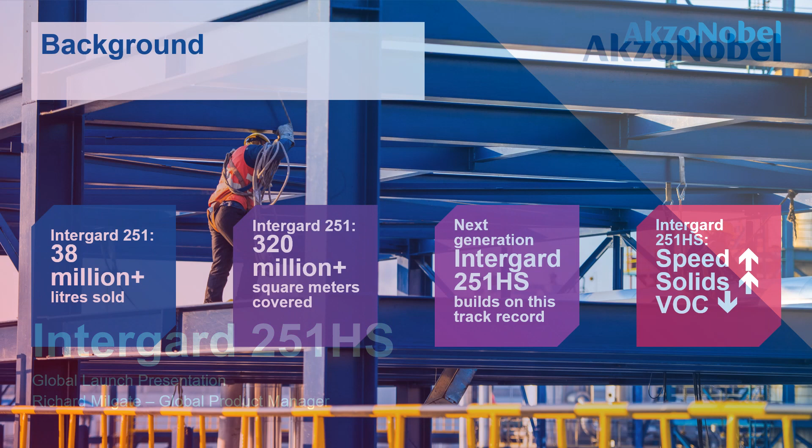Let's start with some background. Intergard 251. We've sold 38 million litres plus worldwide. That's the equivalent of about 320 million square metres of steel covered with one product. The next generation, Intergard 251HS, builds on this track record. We've got increased speed, increased volume solids, and reduced VOC.

Continuing with some more background, Intergard 251 has been the global workhorse epoxy zinc phosphate primer from AkzoNobel International Protective Coatings for a couple of decades. As I said previously, more than 38 million litres sold, 320 square kilometres, 120 square miles of steel that's been painted. To put that in some context, it's about 5 times the area of Manhattan that has been painted with Intergard 251.

Intergard 251HS continues to be phased in as the next generation epoxy zinc phosphate primer, and it's got some enhancements over the previous generation. We were having a DFT range of 50 to 75 microns for Intergard 251. That's been boosted from 75 up to 200 microns. Increased temperature range, 5 degrees, no problem, and increased cure speed across the temperature spectrum. At the time of writing this presentation, we'd sold globally more than 1 million litres already of Intergard 251HS.

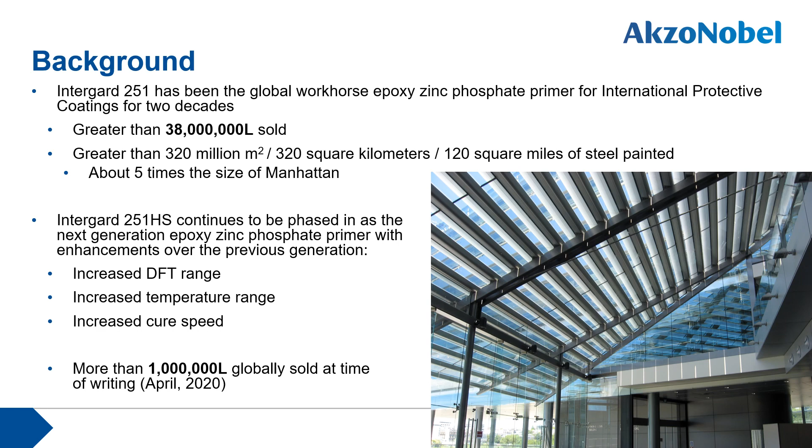Moving on to the overview of Intergard 251HS. There's 3 key features to Intergard 251HS. Versatile and robust application properties. The higher film thickness allowance has meant that complex geometries such as corners and so on have much lower risk of sagging. Less sags means less rework, means less cost and sail out quicker. The product's been sped up as well compared to the previous. We've got faster cure times across the board and reduced recoat.

In terms of system flexibility, with the high thickness allowance, Intergard 251HS can deliver a C3 very high durability, that's 25-year system in 2 coats, and in C4 you can deliver up to high durability in 2 coats.

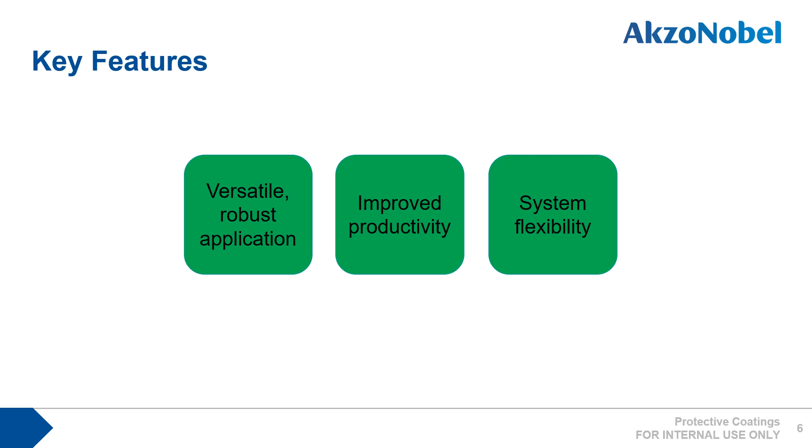So what are the details around Intergard 251HS? It's a 2-component, high solids, fast drying zinc phosphate primer and intermediate in one. 75% volume solids, 243 grams per litre of VOC. Now, depending where you are in the world, there's 1 to 3 colours available, grey, red or buff. In most locations, there's a couple of those colours.

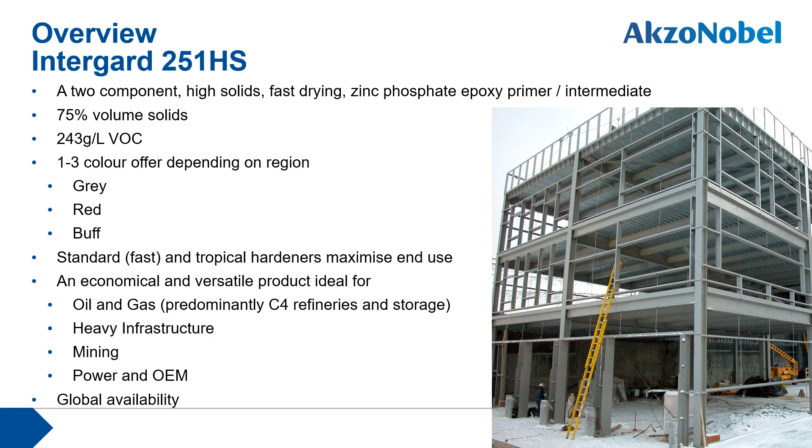We've got 2 hardener speeds. We've got a standard hardener, which is on the faster end, and a tropical hardener to maximise end use. So in areas where we've got 25, 30 degrees continually, the tropical hardener can maximise the pot life there. It's an economical and versatile product ideal for oil and gas onshore, predominantly C4, C3 refineries and storage, heavy infrastructure, mining and power and OEM market. And we're rolling Intergard 251HS out now as a globally available product like 251.

Moving on to the anti-corrosive performance. We've got some external exposure data with Intergard 251HS and painted with 990 over the top. These panels are pictured on the right of this slide. The system we selected for this test was Intergard 251HS, 150 microns, followed by Interthane 990 at 50 microns. We did some real-world exposure on these at the Port of Sunderland in the UK. That's been classified as CX environment, and from the photo there you can see the conditions the panels are exposed to. It's fairly rigorous in terms of the load on the coating there to protect the steel.

On the very right hand side you can see only slight blistering on the scribe at 44 months, which is very good. There's some discoloration there. We don't believe that's due to breaking down of the Interthane 990. We believe that's from a local chemical plant and some pollution that may be landing on the panel with age.

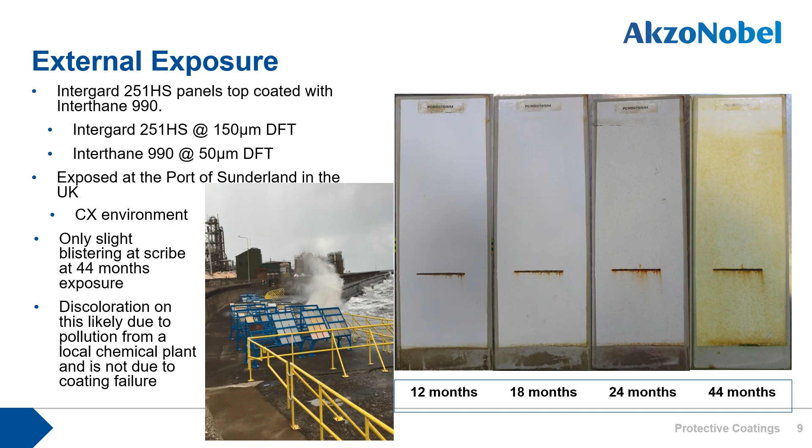Product attributes. For those of you who are familiar with Intergard 251, I've lined up Intergard 251HS side by side to compare the 2 products. The 251HS has got a great improvement in solids, substantial reduction in VOC, nearly to the level of a high solids mastic, and the DFT range is upgraded substantially from 50 to 75 to 75 to 200.

But where I think Intergard 251HS is best is in its curing times. So from the old product, 7 hours at 10 degrees, which was about the bottom end, we've gone to 4 hours recoat at 5 degrees. There's a time saving at 25 degrees as well.

One of the slight disadvantages of 251HS is the pot life is reduced. So at 25 degrees, we've got a 1 hour pot life, meaning your steel needs to be ready before you start mixing up your paint. Now, if that's a bit challenging, there is a tropical hardener which extends the pot life slightly. And for those who are working in, say, 30 degree and hotter environments, you'll probably look to use the tropical hardener straight away.

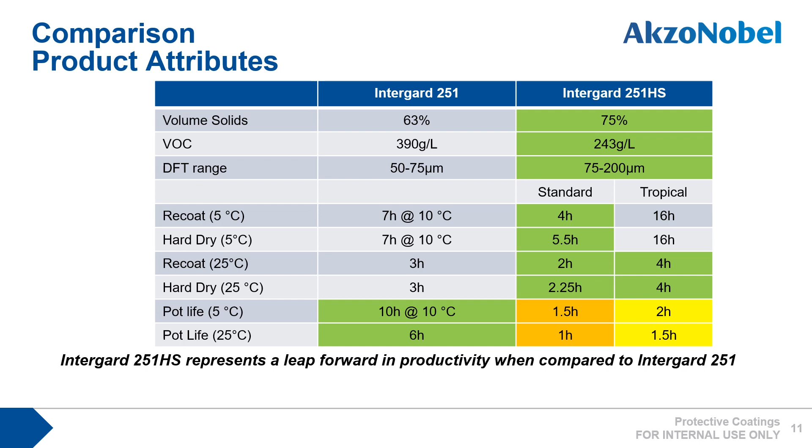Here's an application example from 2017. It's the application of Intergard 251HS to a chute used in the mining industry. There are some areas of complex geometries, and the feedback from the applicator was it was easier to achieve coverage in the flat areas without any sagging in the more complex areas.

On the left-hand side, we can see a picture of the freshly painted steel in the complex areas there with no runs or sags, but achieving the minimum 75 required in the main areas. And the photos are of freshly applied paint, so it's not actually a glossy paint, it's a sort of matte or low sheen paint, and when it's dried off, that gloss will go away.

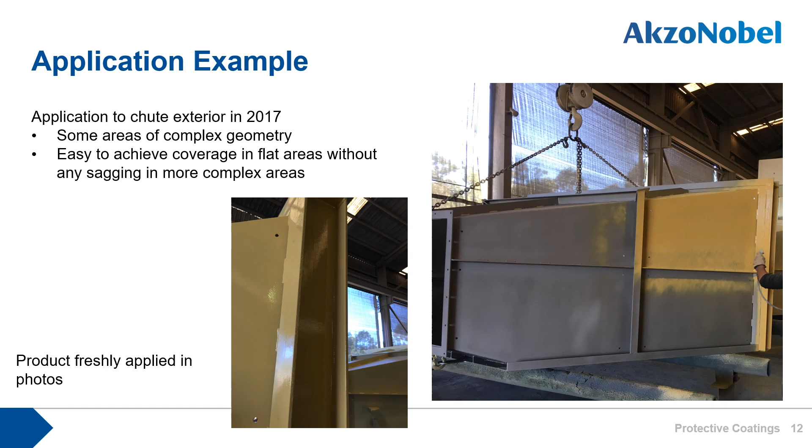Now to look at the competitive landscape. So what makes a great product? Is it one that maximises productivity, has low VOC, has high volume solids, or wide end uses? Or is it a balance of all of the above properties all in one product?

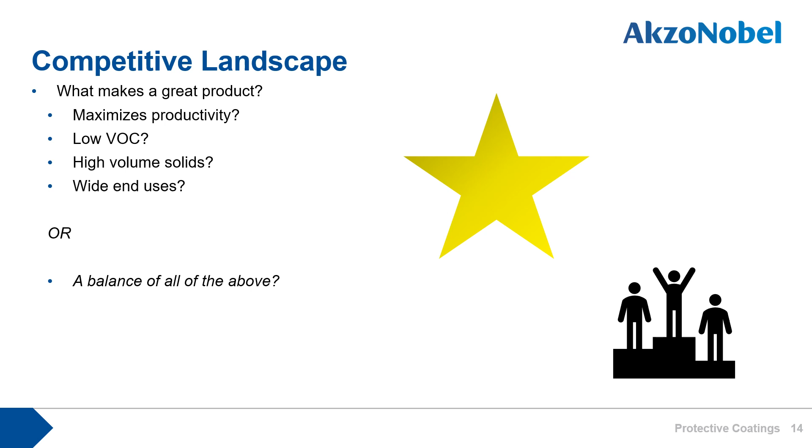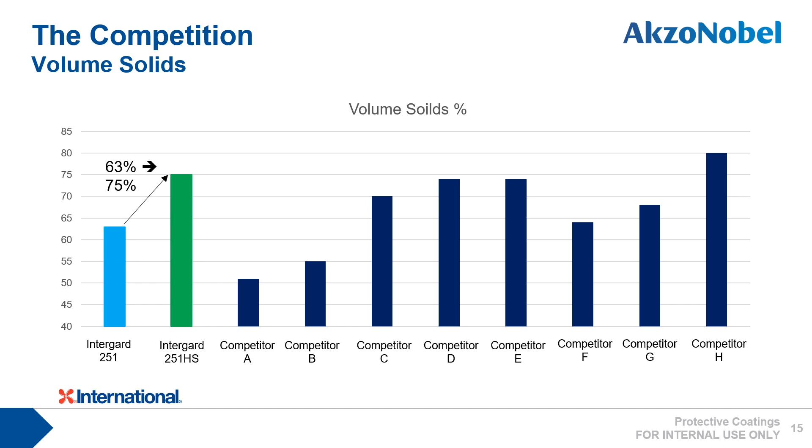A little bit of comparison now between the competition and Intergard 251HS. We can see that we've increased the solids from 251 to 251HS up to 75%. That's kind of put us near the top of the playing field here. On VOC, Intergard 251, we weren't particularly competitive on VOC, but now with the new product, we're down close to the market leader.

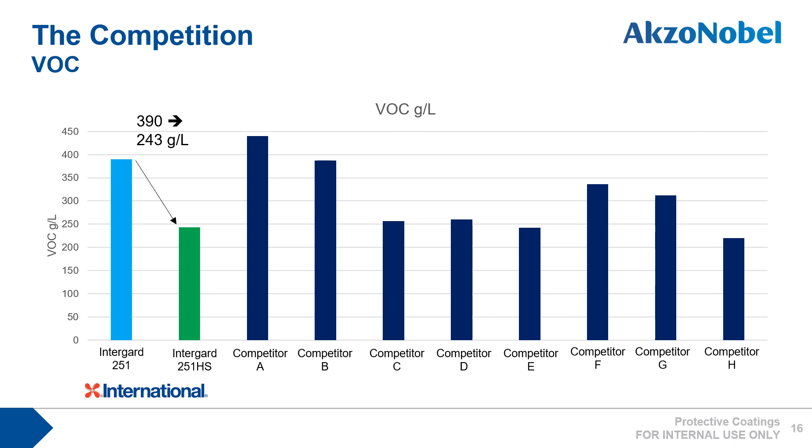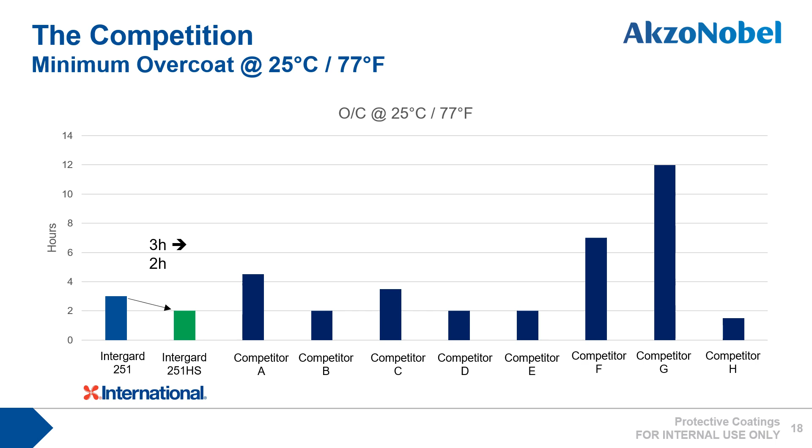Moving on to customer trials. International Protective Coatings was pleased to be selected as the protective coating supplier for Yogyakarta International Airport in Indonesia. The new airport's got lots of steel, and in many situations Intergard 251HS was used as a primer under an Interchar product to protect the building in the event of fire.

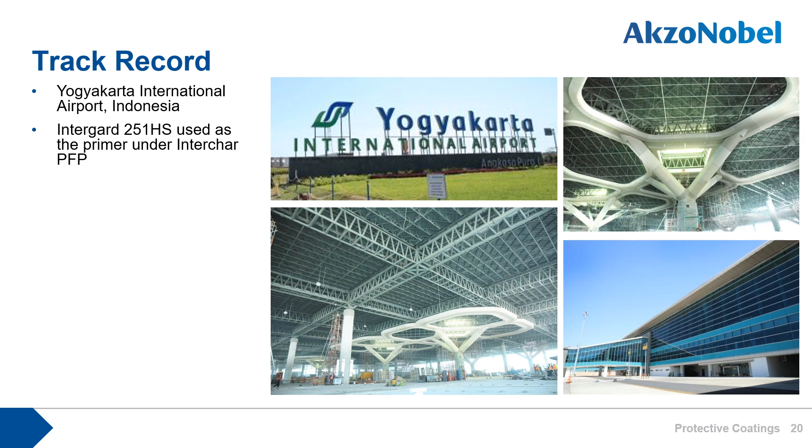System flexibility. In this slide and the next, I've tried to concisely summarise ISO 12944 to show some example systems Intergard 251HS might be used in. For those who are unfamiliar with the standard, effectively it says how much thickness you need of paint before you can protect steel in a given environment.

So for example here, if we had a C3 environment and we wanted to achieve high durability of 15 to 25 years, we need 180 microns dry film of our products. So it looks at Intergard 251HS at about 130 microns plus Interthane 990 over the top at 50 microns. Now you can reduce the thickness of the 251HS slightly if you replace that thickness with the polyurethane or the approved top coat. So we could do, say, 105 microns of Intergard 251HS followed by 75 microns of 990. That would be acceptable as well.

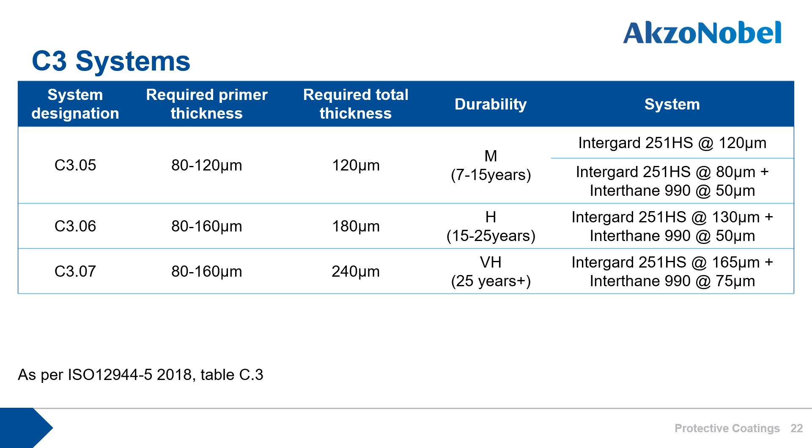In C4, it's a similar situation, but the total required thickness has gone up due to the environment being more aggressive. An example system here, say you wanted high durability, therefore, you'd need 240 microns of paint in total. So we'd be looking at something like Intergard 251HS at 165 microns, plus the top coat at 75 microns. So 990 can be swapped out with other things, polysiloxane and other polyurethanes and so on.

We can't do C4 very high durability with 2 coats, unfortunately. That's a 3-coat system. So you're looking there at, say, Intergard 251HS, plus a mid-coat of Intergard 475HS, plus a top coat again. The take-home message here is that 251HS, with its variable film thickness, is a very flexible product to have in the yard. We can do C3 systems, no problem, and lots of C4 systems with only 2 coats.

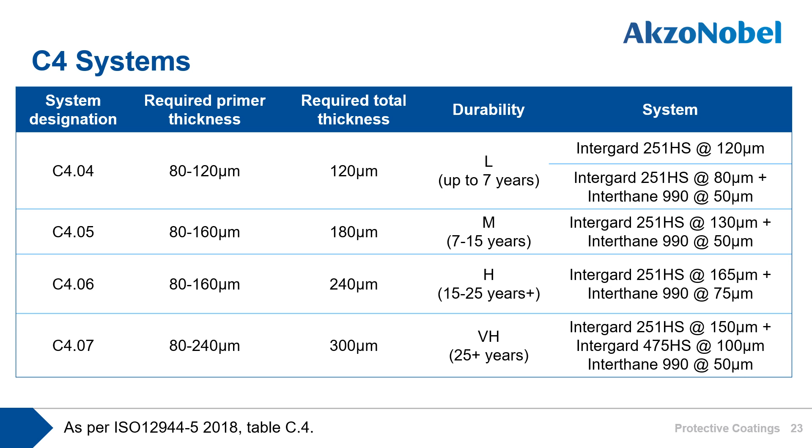Moving on to supply. At the time of recording this presentation, Intergard 251HS was available in the following geographical areas. That's Europe, South Asia, including Australasia, North America, and China. At the time of writing, we didn't have Intergard 251HS already set up and available in Korea and Japan, the Middle East and South America, but we're going to roll them out very soon in 2020.

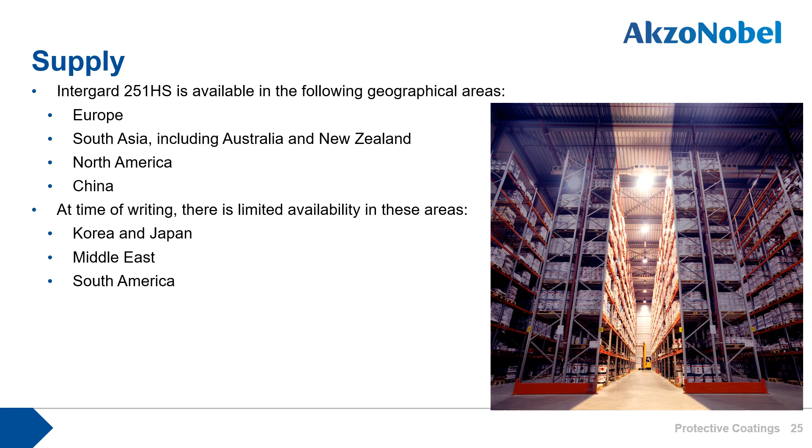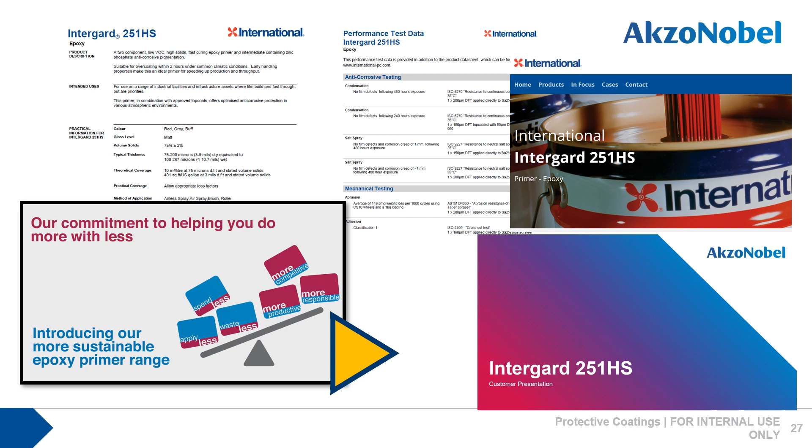Literature availability. We've got a few documents out for Intergard 251HS to support and give you some more information about the product. We've got our data sheet, which most people will be familiar with. Performance test data, for those who are interested, it's available online. We've got our own website there on the right hand side, this presentation, and we've also got a video we made a few years ago about Intergard 251HS and some of the related products.

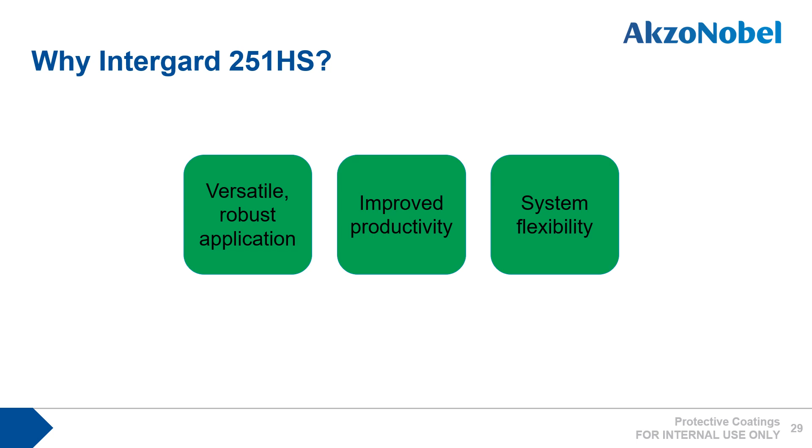Summary. Why choose Intergard 251HS? Maybe because it's versatile, robust application properties. Maybe because it improves productivity with very fast cure at 5 degrees and above. Or maybe because of system flexibility. Primer can be used in a heap of different systems, and C3 systems up to very high durability can be done in 2 coats, and C4 up to high durability can also be done in 2 coats. Or maybe choose Intergard 251HS because it's got a great range of properties overall. It's a very well balanced product.